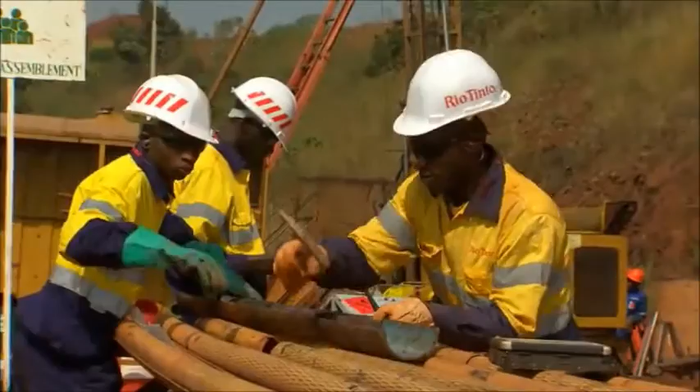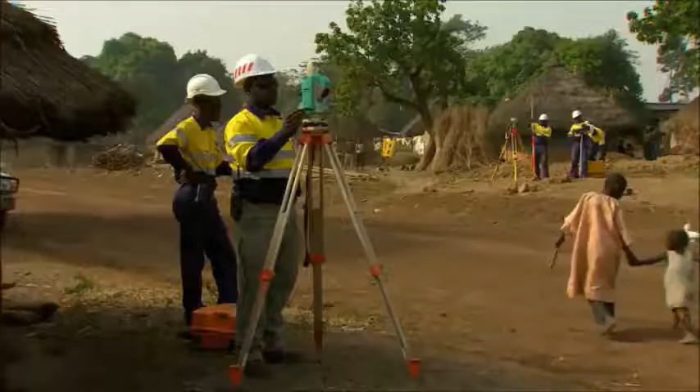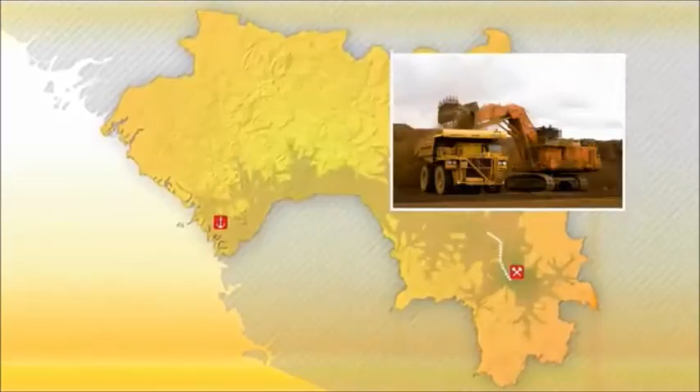The Simandou project consists of an open-pit mining operation in the Beyla prefecture, approximately 650 kilometers of rail across the country, and a multi-user port on the Moribaya River in the Forécariah prefecture. The four project partners, the Republic of Guinea, Rio Tinto, Chalco, and the International Finance Corporation, are working together to develop an industry-leading mining operation that will transform the social and economic development of the nation.

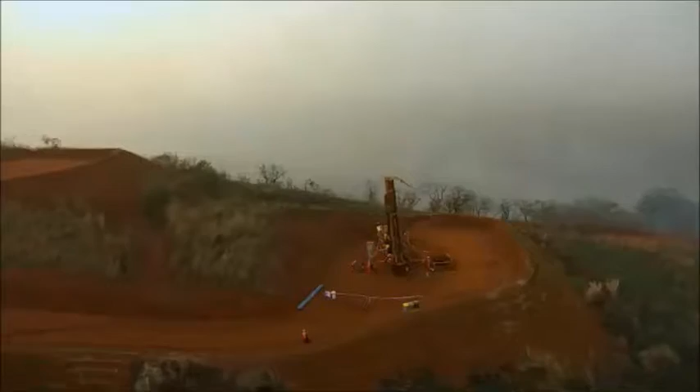Significant resources are required to develop this large-scale project, and the ramp-up to approximately 100 million tons of iron ore production will take several years.

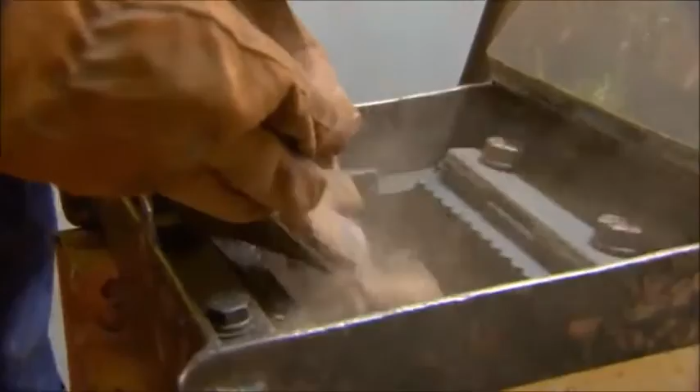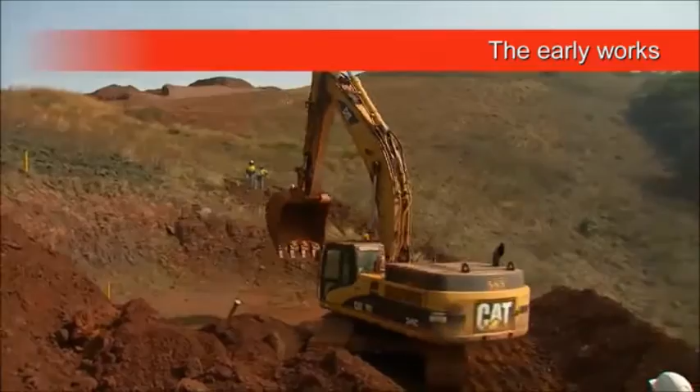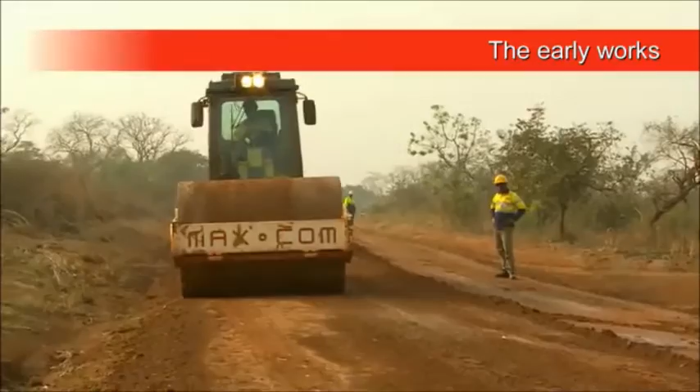The project has already commenced with the development of the support infrastructure, known as the early works. Due to the lack of existing infrastructure in this region, this work is essential to enable construction to happen. It includes construction of a barge offloading facility, development of road infrastructure, rock quarries, upgrades to airports, fuel facilities, and accommodation camps, which will be used for the construction period.

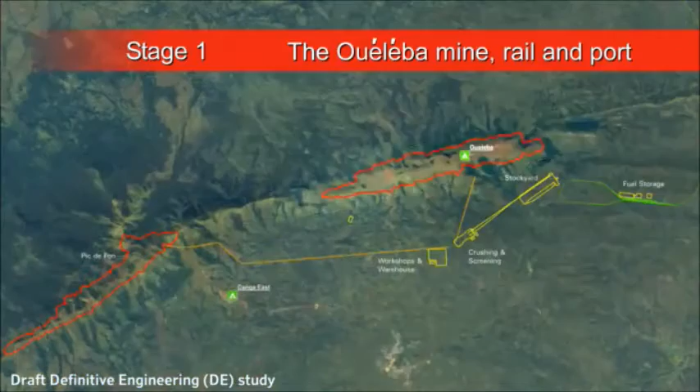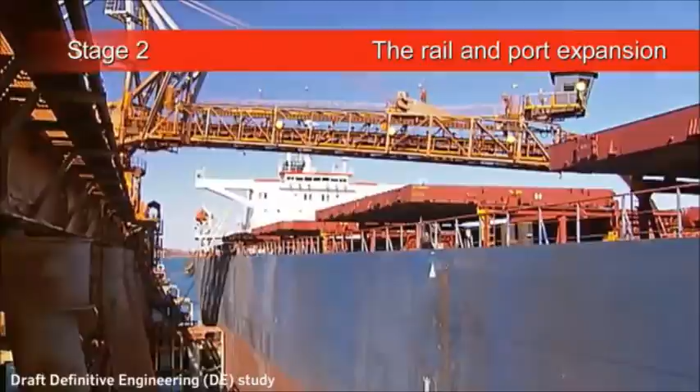This key infrastructure will enable the Stage 1 construction activities of the initial Ouéléba mine, the railway and rail support facilities, and the port assets. In Stage 2, the Pic de Fon mine will be developed, and the rail and port infrastructure will be expanded to facilitate the ramp-up to approximately 100 million tons per annum.

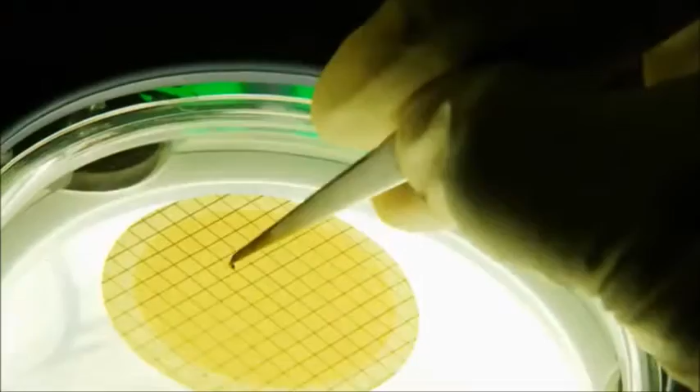The Social and Environmental Impact Assessment, SEIA, for the mine, rail and port components of the Simandou project has been completed. The SEIA provides an evaluation of the direct and indirect impacts of the project on Guinea's physical and natural environment, as well as social, cultural and socio-economic factors.

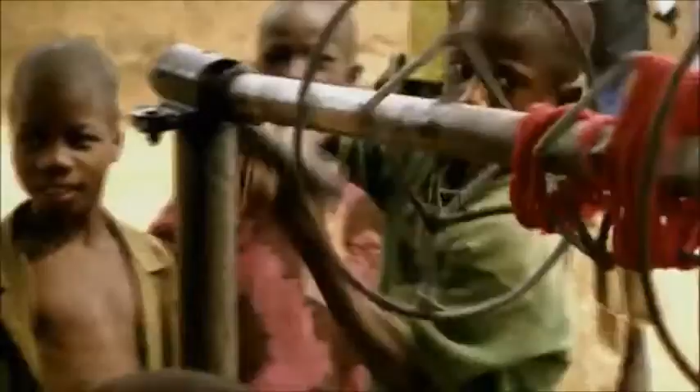A key stakeholder in the project is the people of Guinea. This assessment serves as a guide to the final design of the project, ensuring that Guinea and its people gain the maximum benefit, while at the same time reducing the effect of any potential negative impacts on local communities and the environment.

We have a long history of engaging with the local communities and have already partnered with them on several of their key development priorities.

Local employment programs have been set up to offer unskilled people from neighboring villages job opportunities and training. Through the Guinea Buy Local program, we have also supported the development of local small to medium-sized businesses that can benefit from the opportunities created by the project.

We will continue to work closely with communities to help them face the new challenges and changes ahead.

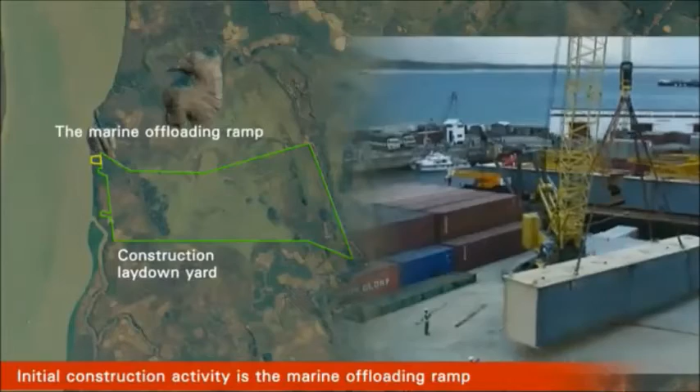Project early work activities have commenced with the development of the barge offloading facility in the Morebaya River. This pioneering infrastructure will enable the equipment and building materials to be delivered for the project construction. A reliable logistics network is key to enabling construction. Roads and bridges along the southern corridor of Guinea are currently being repaired and upgraded.

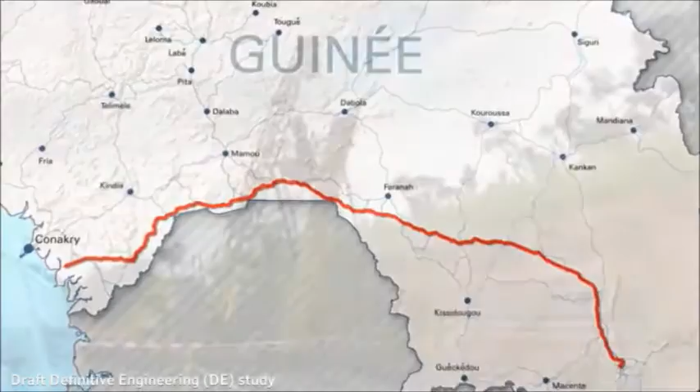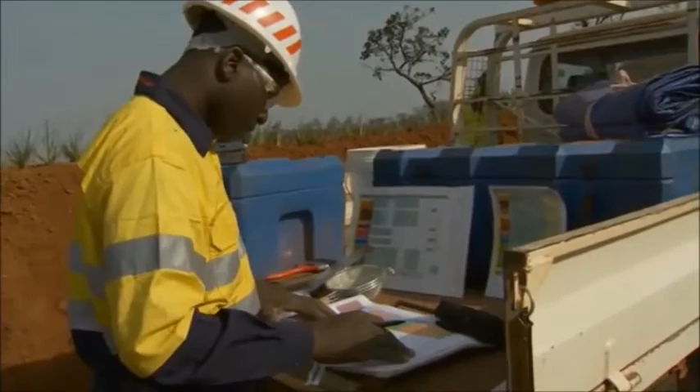The development of a mine is a very long process which takes several years and in-depth technical expertise. The Simandou team has logged and analyzed the samples from drilling and mapped and interpreted the ore body to create a detailed geological model.

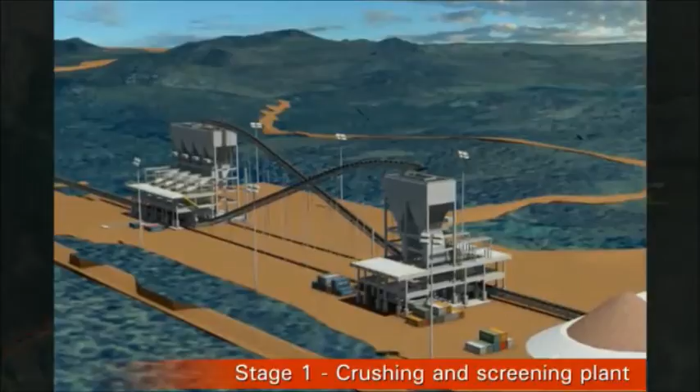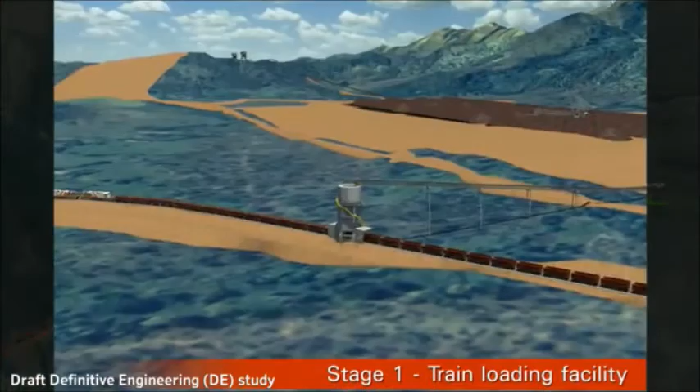The Stage 1 development at the mine includes a conveyor system to transport ore to the crushing and screening plant, a 600,000-ton iron ore stockyard, and equipment to load the iron ore onto the trains. Additionally, workshops, warehouses and fuel storage facilities will be developed.

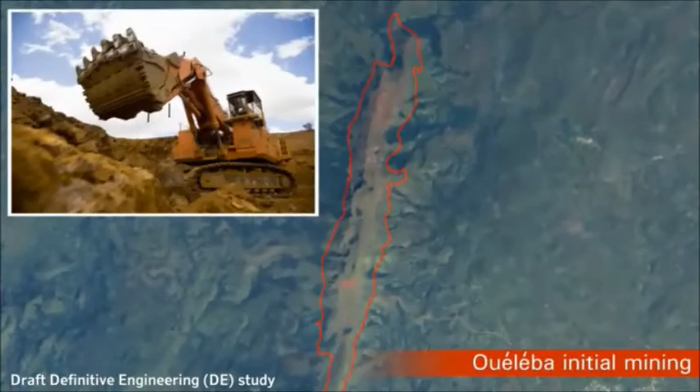During construction of the plant and mining infrastructure, the initial mining operations will commence at Ouéléba to set up the pit for full-scale operations. This initial mining will provide hands-on training for our operations and maintenance teams.

To accelerate the construction of the rail track, a number of individual sites will be developed along the rail corridor. This will enable multiple separate work fronts to progress simultaneously.

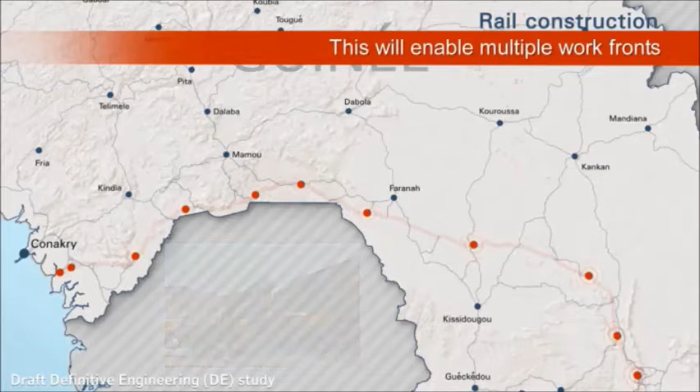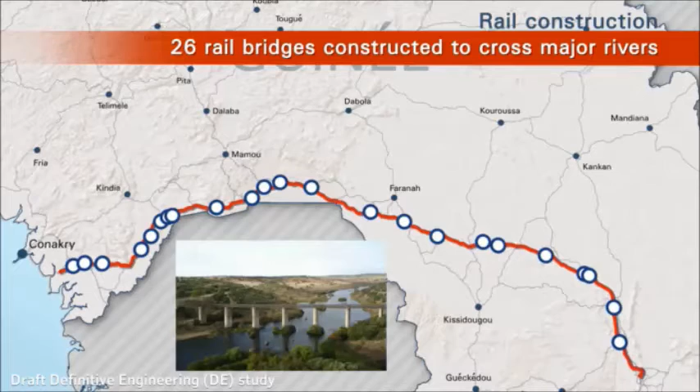With the challenging terrain and many major rivers to cross, 26 rail bridges will be constructed along the corridor. Additionally, 11 road bridges and underpasses will ensure safe vehicle crossing of the rail line. To enable the water flows of minor rivers and floodplains along the rail corridor, more than 1,000 drainage channels will be installed.

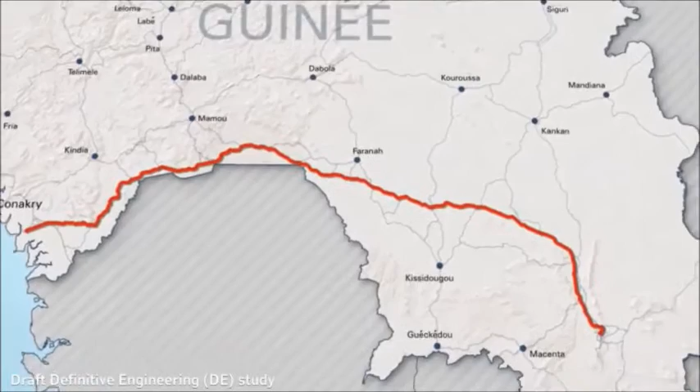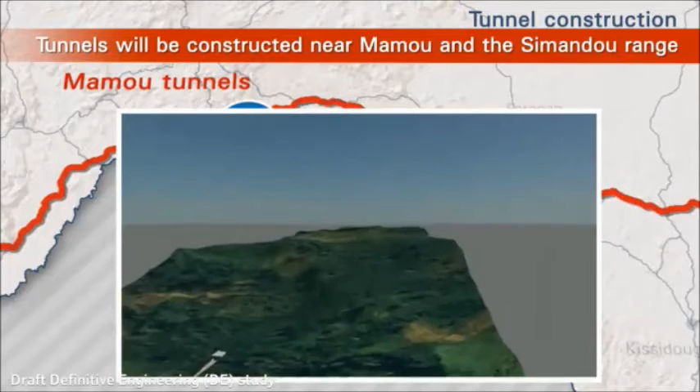To cross the Simandou Range and the Mamou Mountains areas, a series of tunnels will be built. Each of the tunnels through the Mamou Mountains will be approximately 10 kilometers long. To improve the speed of rail tunnel construction, side access tunnels will also be developed. This provides a path to the center of the main tunnel and enables teams to work simultaneously on 4 separate work fronts.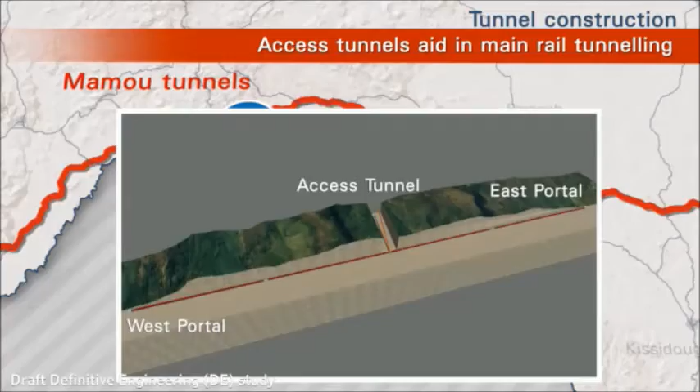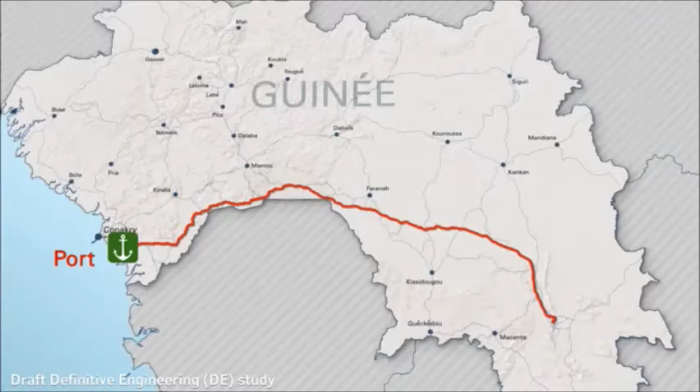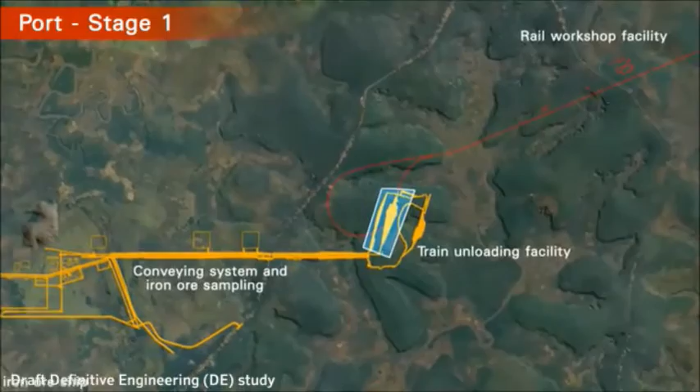The port for the Simandou project will be developed near the mouth of the Morebaya River. The first stage of the port development includes rail workshop facilities, a train unloading facility, a conveyor system linking the unloading facility and the wharf, and 2 iron ore shiploading berths.

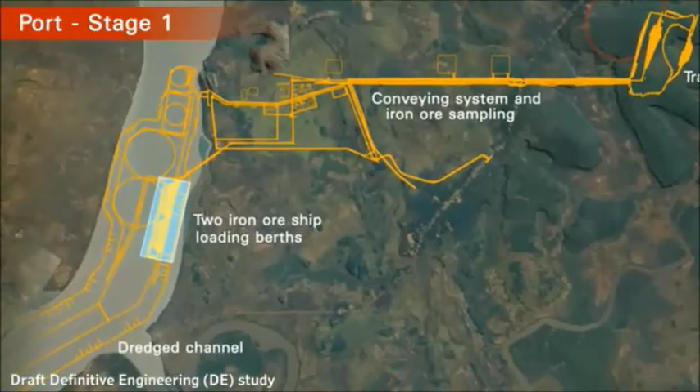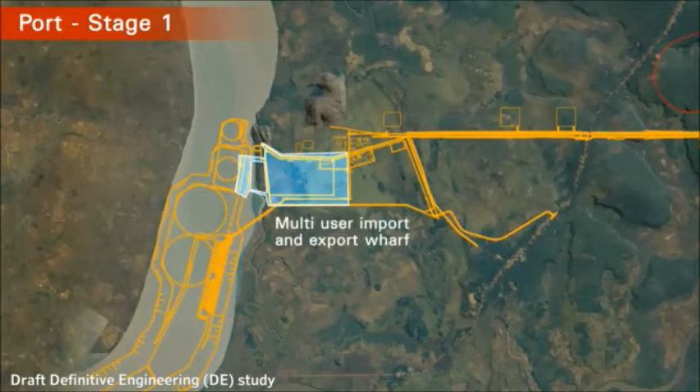In addition to the iron ore export wharf, the multi-user infrastructure delivers fuel offloading facilities and will enable freight delivery and exports. The port on the Morebaya River will enable the largest ships ever to be docked in Guinea and be loaded with iron ore. This will form the basis for a multi-user shipping gateway.

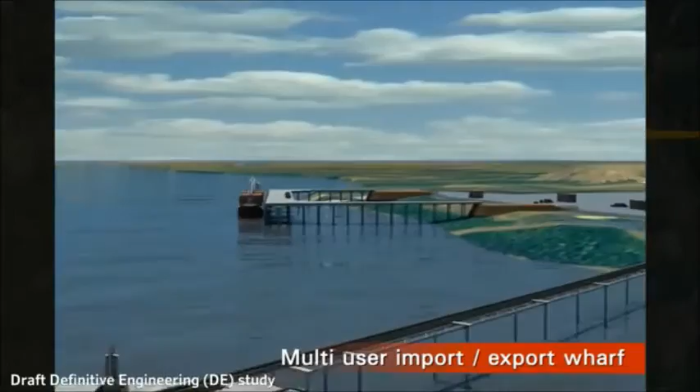The trains arriving at the port will be 2.8 kilometers long, will have 6 locomotives to pull the 240 ore cars, and carry a total of over 30,000 tons of iron ore.

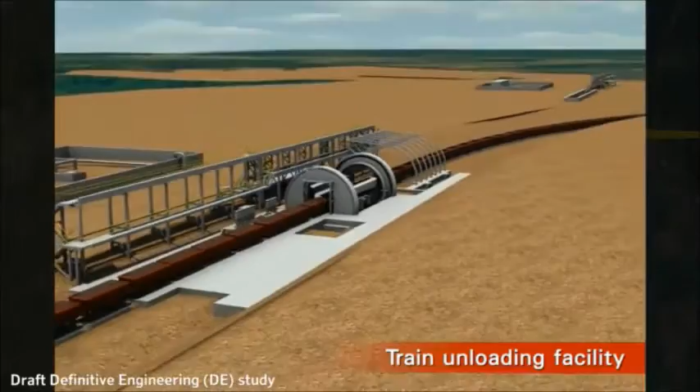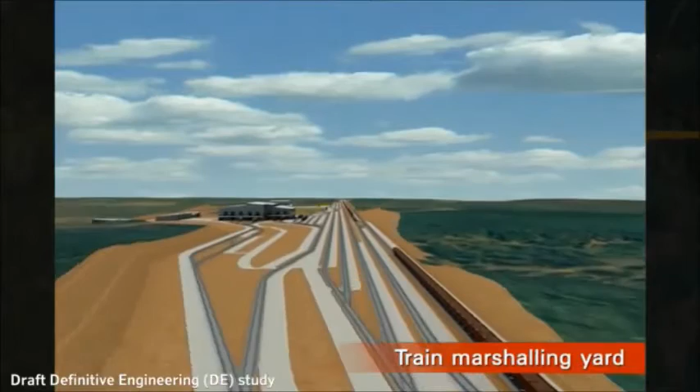The rail workshop area will include the trip servicing facility for refueling the locomotives and preparing them for the next trip to the mine, a train marshalling yard for the ore trains arriving from the mine to prepare for dumping, the rolling stock maintenance building for both locomotive and ore wagon maintenance, and the rail welding facility to join 25-meter sections into the final 400-meter rail lengths.

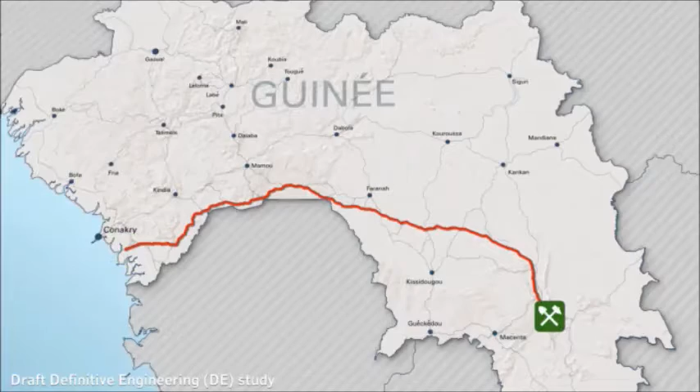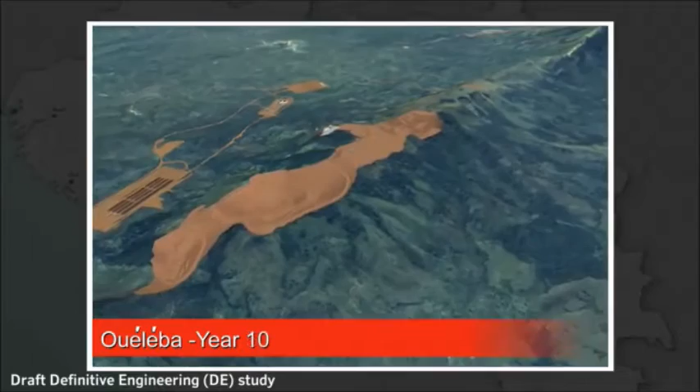In the environmentally sensitive classified forest area, working with our partners and other organizations and utilizing internationally recognized environmental standards, our team have conducted studies to fully understand the flora and fauna and minimize the impact of the project.

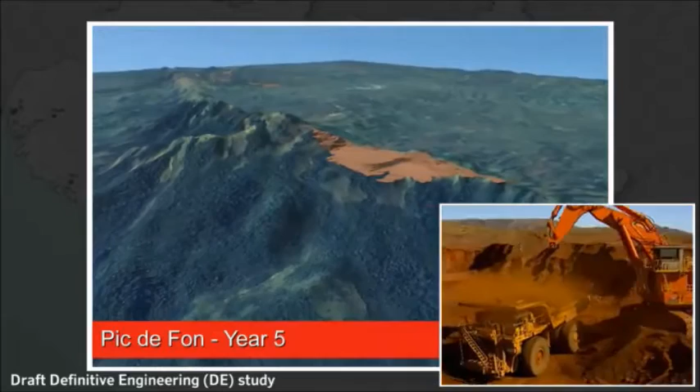As the second stage of construction begins, pre-strip mining will start in the Pic de Fon area. At completion, the 2 mines will ramp up to a total production of approximately 100 million tons per annum.

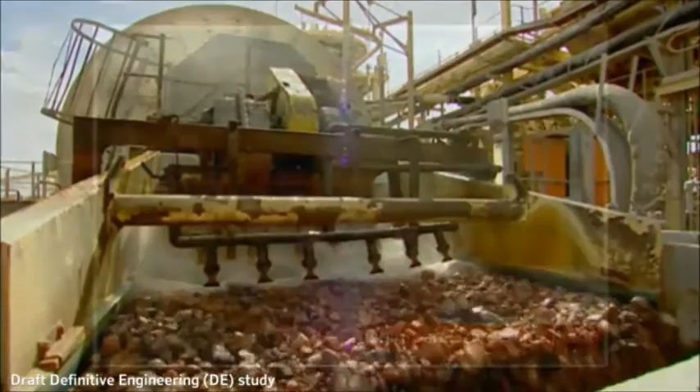The initial crushing and screening facility for the Ouéléba mine will be duplicated for Pic de Fon, and the stockyard will increase in capacity to 1.2 million tons.

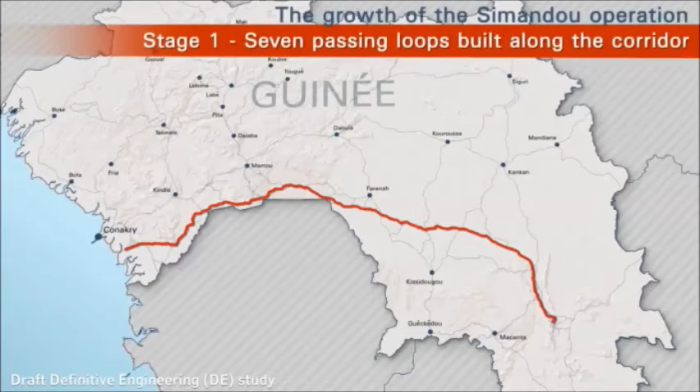For Stage 2, a second train loading facility will be constructed. The initial rail system capacity of 50 million tons will be doubled in Stage 2, with the addition of 6 new rail passing loops and 6 new train consists.

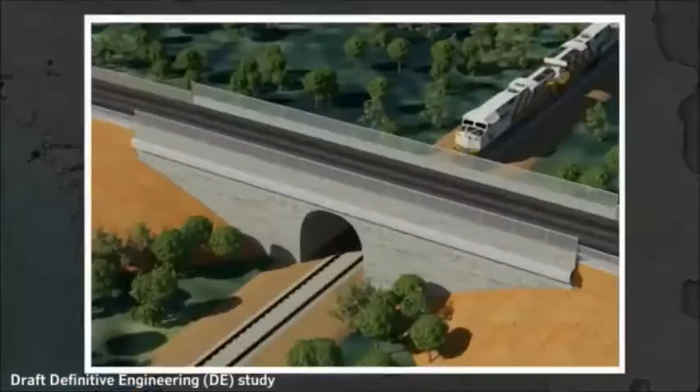At full production, 13 ore trains and additional freight services will be operated using over 90 locomotives and 3,000 ore wagons. The Eastern Mamou Tunnel will be the longest rail tunnel in Africa.

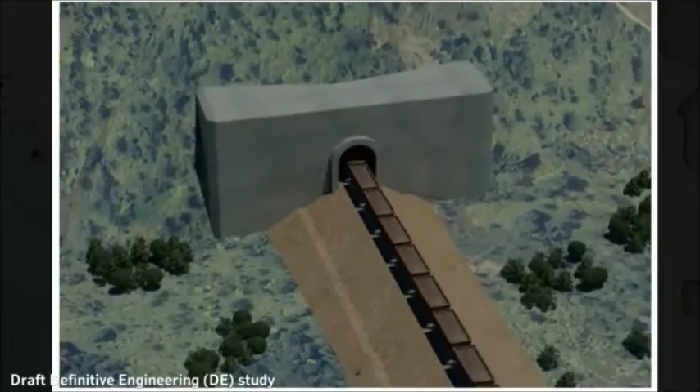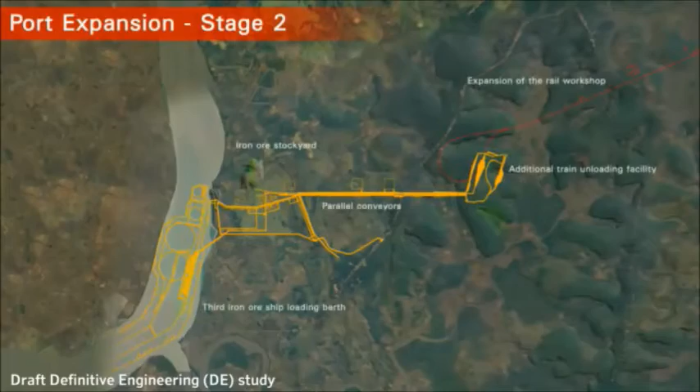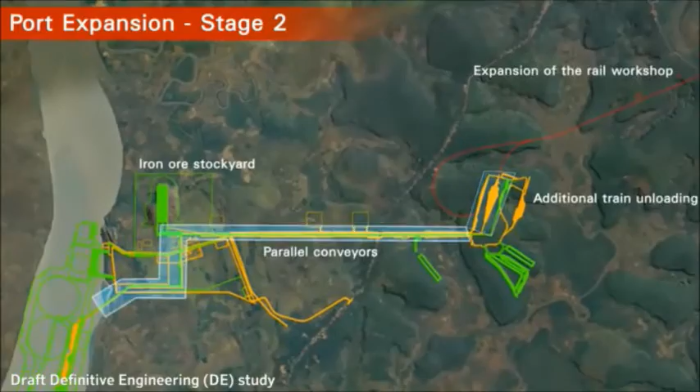At the port, the ramp up to about 100 million tons will comprise expansion of the rail workshop facility, an additional iron ore dumper, a parallel conveying system, a new iron ore stockyard, and a third iron ore shiploading berth.

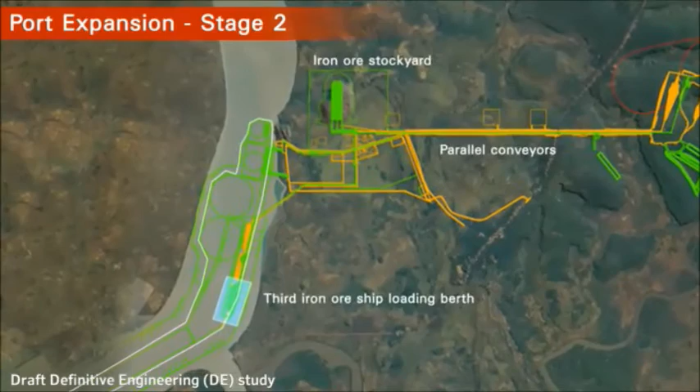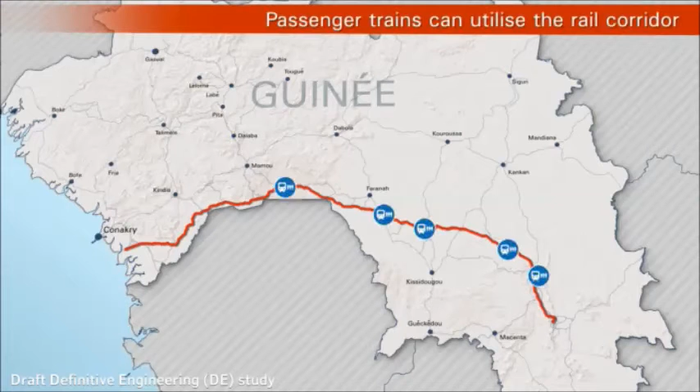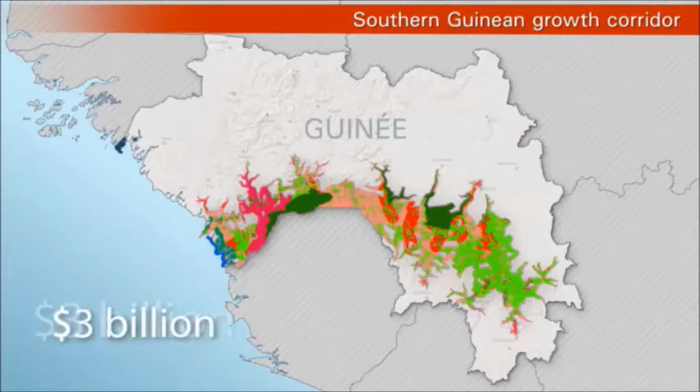In addition to transporting the Simandou iron ore, the rail system is designed such that passenger services can be provided. The Simandou rail and port system is the key infrastructure which will create a southern Guinean growth corridor. This will enable the development of multiple businesses along the growth corridor, with the potential to generate up to an additional $3 billion of GDP in Guinea.

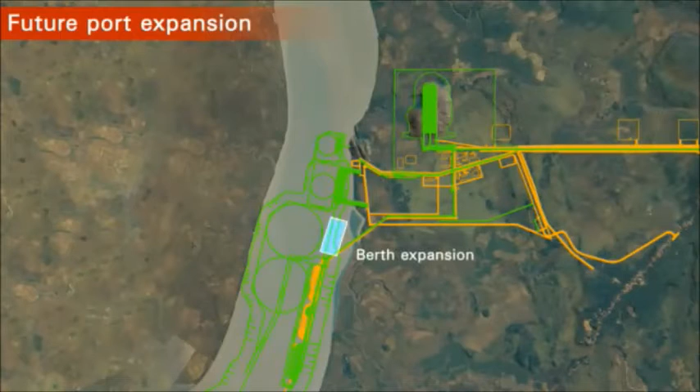The corridor also facilitates the development of other mineral deposits, with the rail operator offering transport services to the port. At the port, a number of potential future expansion options exist to support other mineral exports and the Southern Guinean Growth Corridor,

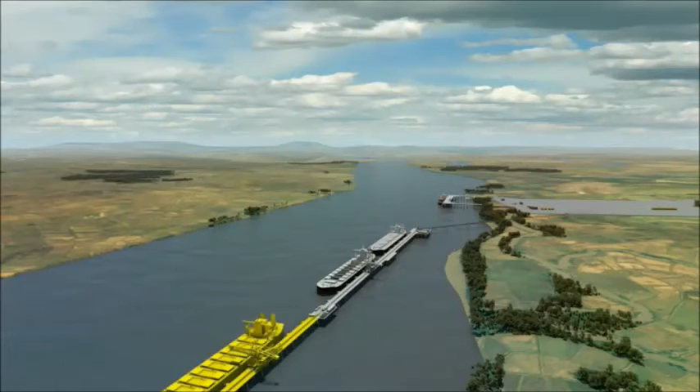including the ability to expand the existing iron ore berth, develop additional mineral export berths, further agricultural export facilities, new stockyards, and a second rail terminal on the Northern River bank.

The Simandou project, a future of growth and opportunity in Guinea.